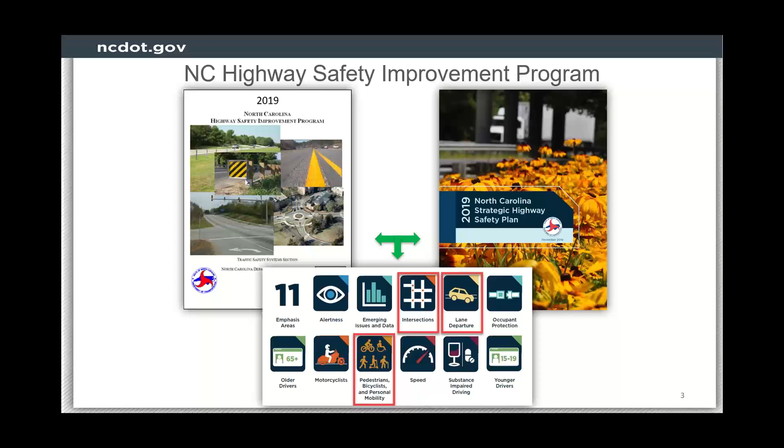So that's a pretty aggressive goal, but this should inform many of our policies and programs and decisions in North Carolina as we go through. Next. So the Highway Safety Improvement Program, we do align it with the Strategic Highway Safety Plan. This is an infrastructure safety program, and so it's focused more on improving the roadway to have the safety results that we would like to accomplish. It does include a focus area on pedestrian safety. It's a broad-based program for intersections, lane departure, but does focus specifically on improving pedestrian safety across the state. Next.

So many people have heard about the pedestrian safety trends recently across the country, and it's definitely pronounced in the South as well and in North Carolina. In the last decade alone, pedestrian fatalities have increased over 50%. That's a national statistic, but it's pretty much in line in North Carolina as well. Almost all of that increase has occurred in urban areas, and specifically on urban arterials, and that's true in North Carolina as well. Rural pedestrian fatalities have stayed relatively constant over time, but our urban areas and arterials are seeing most of the increase.

Darkness and crossing are very, very common characteristics of these pedestrian fatalities. About 90% of that increase in pedestrian fatalities has to do with people trying to cross the road between intersections and in darkness. Those conditions are pronounced in pedestrian fatalities, but they're more significant on urban arterials.

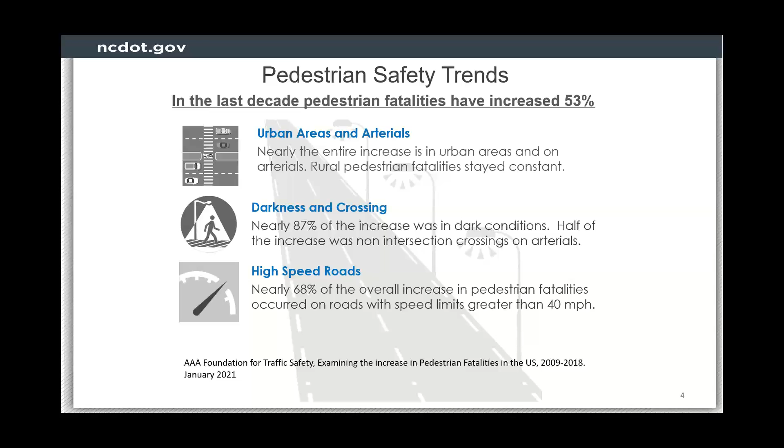High speed, that's well documented as a risk factor for pedestrian fatalities. Again, about 68% of that increase in fatalities has occurred on urban arterials where speed limits were greater than 40 miles per hour. So in North Carolina, the risk of death and serious injury on urban arterials is 5 times greater than other urban roads. And so that's why this is a common theme for us in North Carolina.

Our pedestrian safety improvement program, which is part of our HSIP, looks at pedestrian safety in 3 main ways. The first one, which we're not going to touch on much today, is responsive. That's your typical black spot or hotspot type of program where it's reactive based, right? Crashes have happened. They've accumulated enough to be significant and get attention, or perhaps we've received requests for assistance or complaints from citizens or cities, local government, and so we're responding to those requests, and that's typically pretty effective.

You can get pretty good pedestrian safety projects from that type of program, but it misses a lot of opportunities to improve pedestrian safety because pedestrian crashes do not always follow standard ways of accumulating in one spot that you can treat, right? There's a lot of risk factors that we just went over on those urban corridors in particular. So we have to look at other data sets in addition to just crash data in order to fully understand and really to be able to fully develop a program to focus on pedestrian safety.

So with the city and area and the corridor, those are much more systemic based, where we're using a lot of different data sets and understanding how those data sets relate to pedestrian safety and risk. And we'll get into that a little bit more today on the corridors in particular.

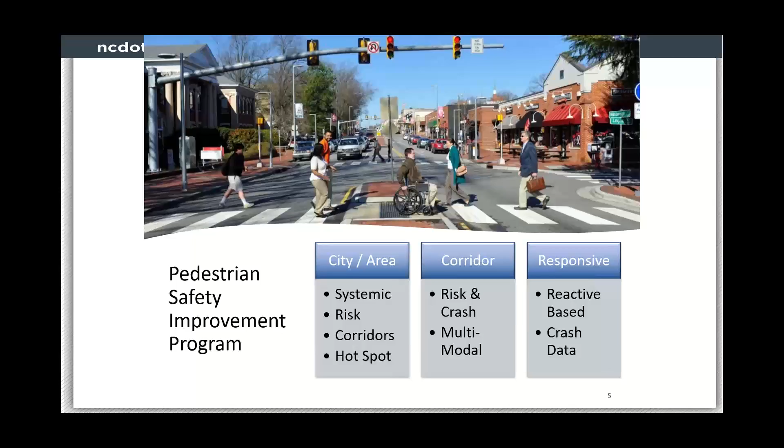So in North Carolina, our corridor risk scoring method, as you can see, and as we just mentioned with the systemic approach, does include crash data. Severity and frequency and density of crashes is considered, but we also look a lot at roadway characteristics as well that we know contribute to the risk of a pedestrian crash occurring and the risk of death and serious injury, such as speed and ADT, crossing distance, and distance between signals. We know that those relationships exist, and we know that they can be very relevant in how we make decisions for pedestrian safety.

Probably some of the biggest area for growth in understanding pedestrian safety in recent years has been in the demographic type of information, using different census data, transit density, land use and population density, different levels of vehicle ownership. All those are very important. In the case study that we're going to share in just a minute, you'll see a lot of those things come up again and again in that process.

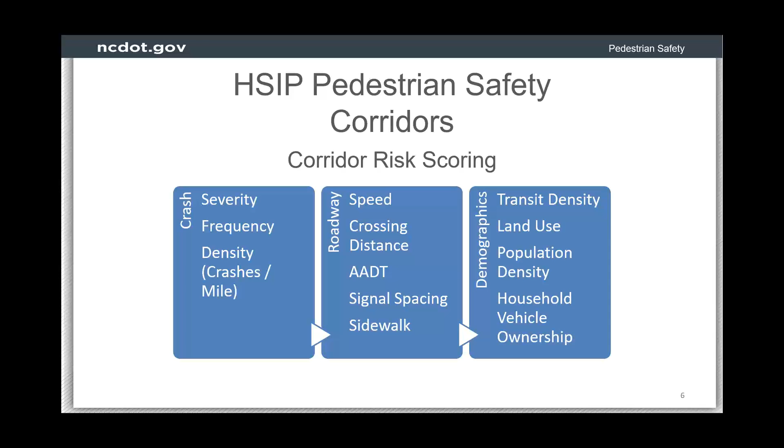Again, using risk-based screening has been very helpful in prioritizing different sections, looking at income level and understanding pedestrian volume. This is a big one because we know that pedestrian exposure is very significant in how it relates to the opportunity for pedestrian crashes to occur. But it's very difficult to find very rich data sets for pedestrian volume. So it's, again, very important to look at land use and transit and different census data in order to understand where that exposure may be higher, and then allowing that to help inform our programs as we select corridors for further improvements.

But eventually, after you select corridors, we do need to go visit them. We do need to make sure that our programs involve reviewing and really trying to find some low-cost safety improvements that can be implemented quickly. That's a big focus of our program, to be able to move quickly to address safety. So low-cost projects that have a big impact on safety are always our first consideration.

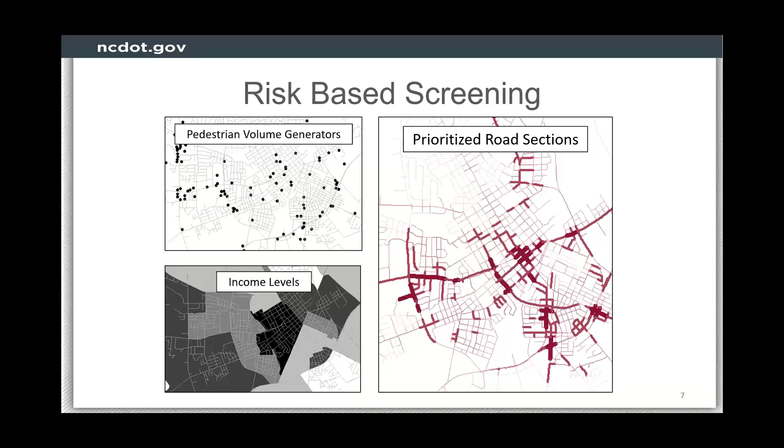With that, Lauren's going to go over a case study on NC54. This was a great project that involved VHB, NCDOT, and a couple of local governments and various agencies. Lauren? Thanks, Brian.

NC54 began as a study for a number of stakeholders in late 2018 after several agencies, including the towns affected, had identified this corridor for some pedestrian safety concerns. So NCDOT convened that group of stakeholders, including the towns, transit agencies, and others, to look at this corridor and talk about what some recommendations might be for improving pedestrian safety, considering elements of risk. So VHB was glad to be a part of that team, and we finished the study in late 2020.

So NC54 is a regional corridor. It's an east-west corridor that connects the Greensboro Triad region all the way to the Raleigh-Durham Chapel Hill Triangle region. It functions as a major regional commuter route for a lot of folks who live in the Piedmont region of North Carolina. We focused on a 4.5-mile section of 54 that passes through the towns of Carrboro and Chapel Hill, and also borders major destinations such as UNC Chapel Hill and the Healthcare Center.

So NC54, built many decades ago, was first established to facilitate that regional transportation, but over time development, housing development in particular, the introduction of transit networks and other growth have changed how people use this corridor and how they interact with it. So that was an important prompt for us.

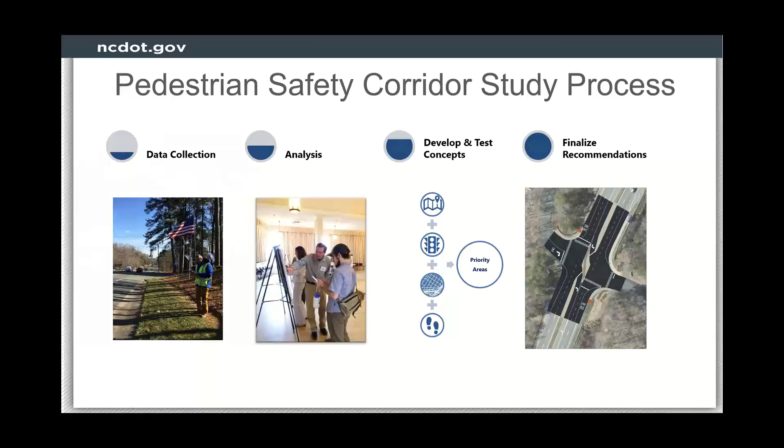So as part of the initial field review, we were able to work with Chapel Hill Transit to put the stakeholders on a bus. We drove the corridor, stopped at multiple locations, observed people, traffic, physical conditions, potential safety issues, and convened the stakeholders back together, listened to each other's observations, took notes.

And so things that we would have noticed in the field looked a lot like what you see in this slide, where some folks were identifying how people were crossing the road, what direction they were traveling. In some cases, we were able to talk to people as they were crossing the road or after they had crossed the road about where they were going, learning a little bit more from people in the field. And other notes, especially from those who have had more experience with this, identified even some potential recommendations while we're in the field.

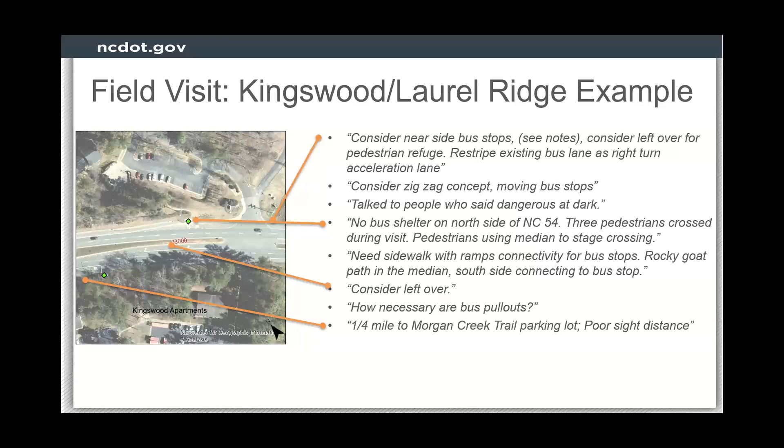At one location, some of the NCDOT staff identified some immediate opportunities for improving crossings at a major intersection on the eastern end of the corridor.

So the team also wanted to hear from people who live along the corridor. We posted an online survey. We posted a QR code in the bus shelters along the corridor, and that helped generate a lot of public feedback. We had over 700 responses from people who live and work along the corridor, a lot of folks who use transit, of course, but others who were students or maybe just got communication from the towns. And we asked them questions about what their experiences and observations have been.

And so a lot of that confirmed some of the safety concerns that Brian mentioned earlier, which is concerns about how pedestrians were crossing and walking along the roadway, especially in dark conditions, and especially in the sections of the roadway where traffic speeds are highest. So this helped validate some of those data points that we had collected.

So we did look at pedestrian crash locations in the history, and for arterials like this, pedestrian crashes may be few and far between. When they do occur, oftentimes they can be more severe or fatal. So we took a good look at that, but of course, the patterns may not be very revealing. So we considered where the crashes have occurred, but also looked for ways that we could fill in the gaps to understand risk.

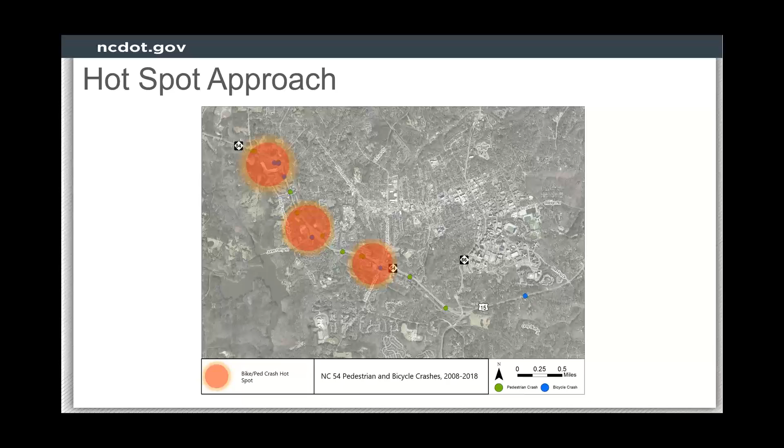So we collected data about speed, traffic volume, pedestrian activity. We wanted to have a better understanding about the traffic speeds relative to the posted speed. So the posted speed was 45, and in some cases, the 85th percentile speed was in excess of 55 miles per hour. So that middle section of the corridor, especially where there are uncontrolled crossings and a lot of apartment complexes, those speeds were especially concerning to us. So we were thinking about how that translates into risk.

And you can see here that the ADTs on the western end, nearer to the Carrboro end of the corridor, are about 20,000 vehicles per day. That doubles on the eastern end. Part of that's how it interacts with other major corridors that go north-south throughout the study area. But approaching 40,000 vehicles per day, that certainly limited some of the options that we could consider, and it just made this risk and exposure all the higher.

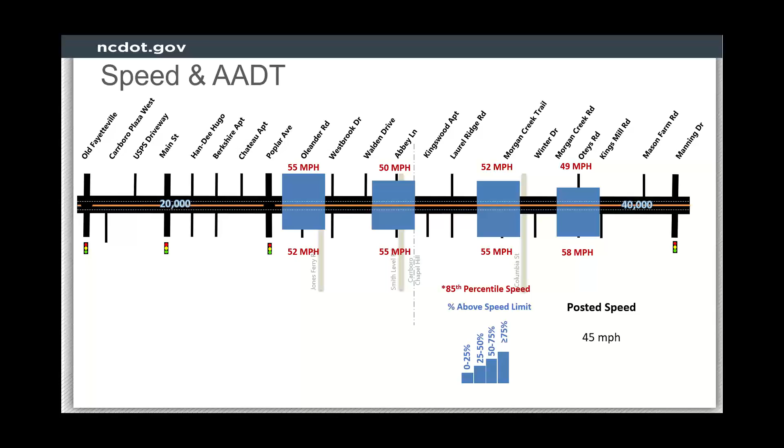So when we have transit on the corridor, it becomes a really important data point for us to collect. We worked with Chapel Hill Transit to collect boarding and alighting data. We mapped that along the corridor where there were bus stops. So the bus stops stop in the eastern third of the corridor, but where we did have bus stops, we not only looked at the number of people getting on and off, but the balance of the number of people boarding and alighting at a particular bus stop.

So how many people were getting on and off at the same bus stop, or where did we see some particular imbalances? So for example, if you look at the intersection of Laurel Ridge Road and NC 54, you can see that that pair of bus stops across the road have a major imbalance. A lot of folks getting on one bus stop and then getting off on the opposing bus stop. So that led us to understand more about what may be happening along the corridor.

The pedestrian volume data, the crossing data in particular, confirmed a lot of what we were beginning to think about the corridor. Where we saw those bus stop pairs and the imbalances in the alighting and boarding, we saw the heaviest pedestrian crossing data. If you think back to that crash map that I showed earlier, there were very few pedestrian crashes in that middle section, but the risk is highest in this section.

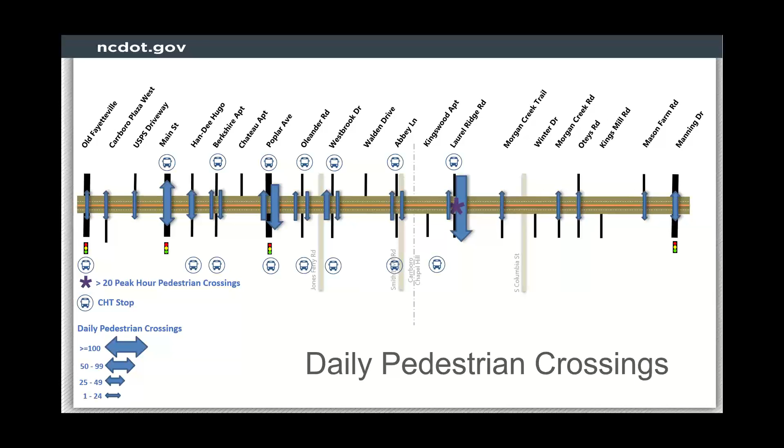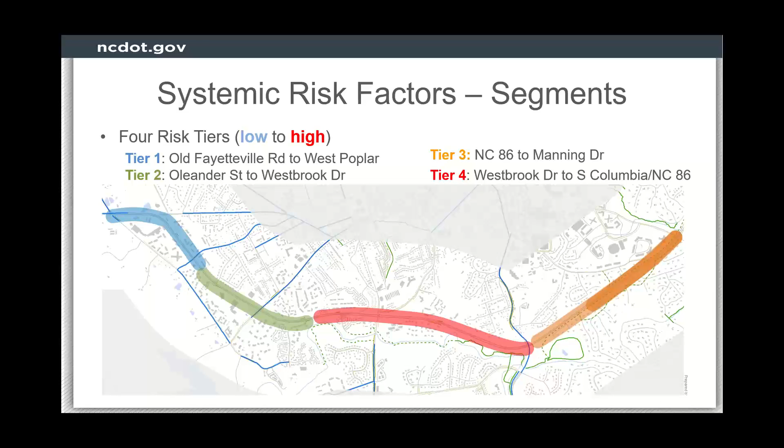So all composed together a risk factor map for the corridor. This helped us to prioritize the locations that we wanted to delve into the most. And so that helped us, again, focus on that middle section where speed, volume, pedestrian activity, transit stops, and development were pointing us to the highest risk. So this middle section got a lot of our attention, but certainly we identified recommendations for almost all of the intersections along the corridor, as well as some considerations for how the network functions overall.

And so considering how transit was an important risk factor for this corridor, we did think about how we could maybe consider some transit alternatives. What would happen if we were to propose route changes, scheduling changes? Would that impact pedestrian activity and safety in a substantial way? We looked at several alternatives, and this was just to understand if there was an easy win, an easy way to be able to address this.

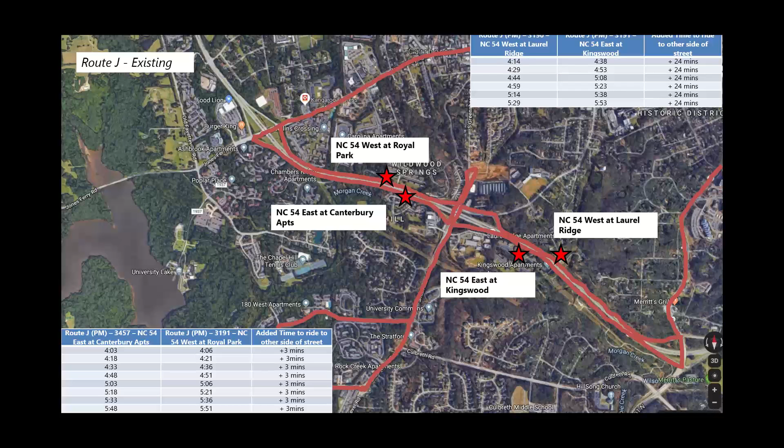But considering that these are people who rely on transit to get to where they're trying to go, there was a balance between their own mobility and how the changes to the transit system may impact that. So we looked at several alternatives and really couldn't find a good alternative that was likely to reduce that demand for crossing. So we did coordinate this with Chapel Hill Transit, and it led us to know that we needed to look harder at ways that we could improve the physical crossings along the corridor.

We coupled this information with what we were hearing from the towns as well as NCDOT about the future for connectivity across and along the corridor. A lot going on here. The towns had plans for bicycle and pedestrian networks, both along 54 as well as parallel to NC 54. NCDOT was preparing to study the eastern end of this corridor for a major widening improvement.

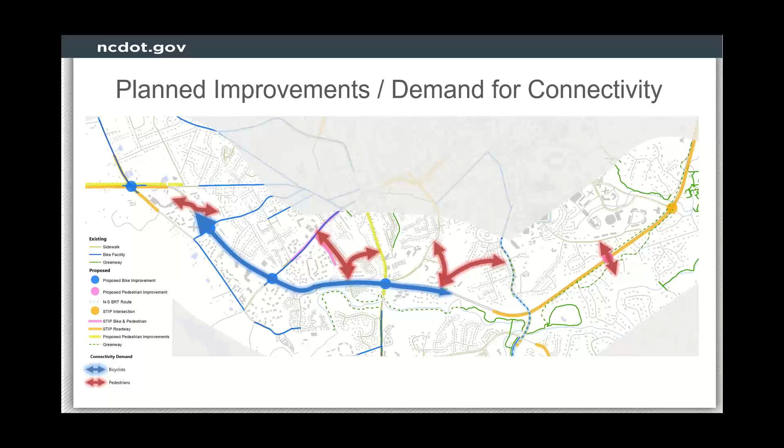And then also we looked at physical proof that there were people walking behind the corridor. So worn paths in some of the natural areas connecting those apartment complexes, which are typically isolated and not connected into a larger transportation grid. So we looked at all of that to help us better understand how people were moving along the corridor. And that helped us develop what we were calling a connectivity plan.

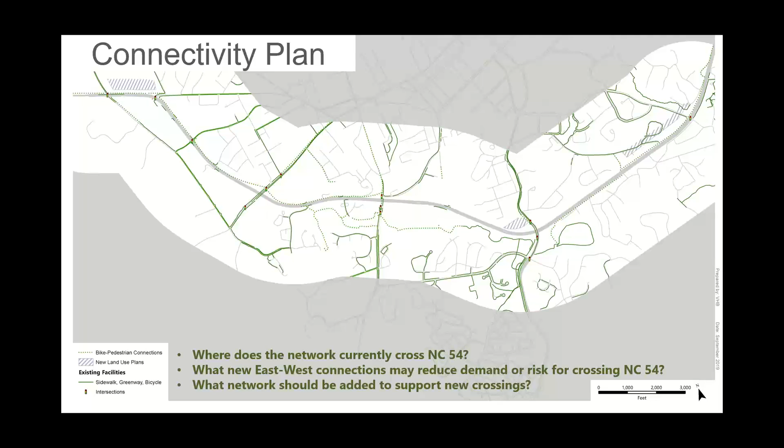So the intent is not necessarily to build all of this network as part of the safety improvements, but again, to help us understand where people are most likely to cross NC 54 today, as well as in the future, lining that up with risk, lining that up with where the towns were going in terms of some of their short-term projects, where they were building new greenways, for example, along NC 54, where those were likely to come up to NC 54 in the near term, to help us make sure that we weren't overlooking any important crossing opportunities in the future.

So altogether, we looked at improving pedestrian safety at multiple types of conditions, signalized intersections, several uncontrolled crossings, like I mentioned, where there were no formal crossing accommodations, no traffic signals. That was an important part of this study as well.

And then continuing to communicate with the towns about how we could integrate their connectivity plans into longer term improvements as well. So the study team, including the towns, have continued to use this study for their own work to prioritize some of the pedestrian improvements that they're planning to build nearby. And then NCDOT continues to look at some of the recommendations that, as Brian mentioned, could be implemented in the near term, especially where those low cost improvements could make a big impact on improving pedestrian safety.

So with that, I think that'll cover the study area and the study process. And Brian, I don't know if you have other things to add about where things go from here.

You're on mute, Brian. Uh-oh. Oh, there you are. All right, there we are.

Thank you. Yeah, on this corridor in particular, it gave us a good opportunity to really think through a lot of the risk factors that we had been working with for some time, and being able to see how those really did work in terms of identifying risk and helping us prioritize efforts was beneficial. So those processes will continue to be refined, and the program will continue to become better established in

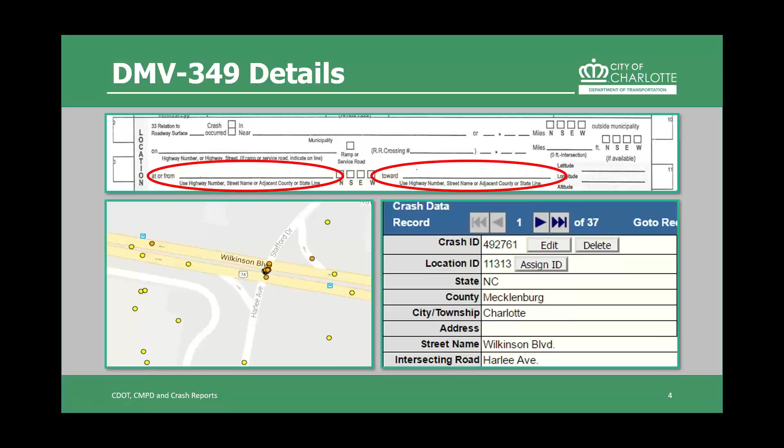So I'd like to share with them details of the form that they fill out, which is called the DMV 349 here in North Carolina, that we get the at or from data and the toward data. That's important for us. That's what shows up down here in the Wilkinson Boulevard at Harlee Avenue. At Wilkinson Boulevard, the intersecting road is the toward street. And at driveways in particular, giving the street address or a business name or distance from the intersection is especially useful.

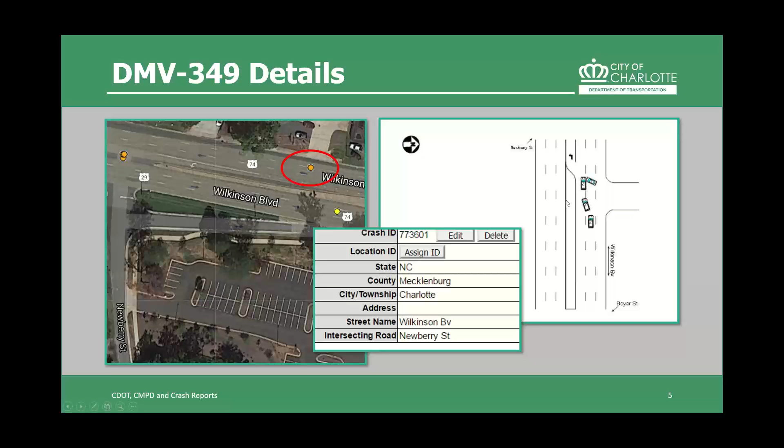So without reading the narrative and looking at the crash diagram here, my staff member who geolocates every one of these crashes would have located it at Wilkinson and Newberry Street, but because of the diagram, he saw that it was at the driveway, and so was able to geolocate it appropriately to be at the driveway.

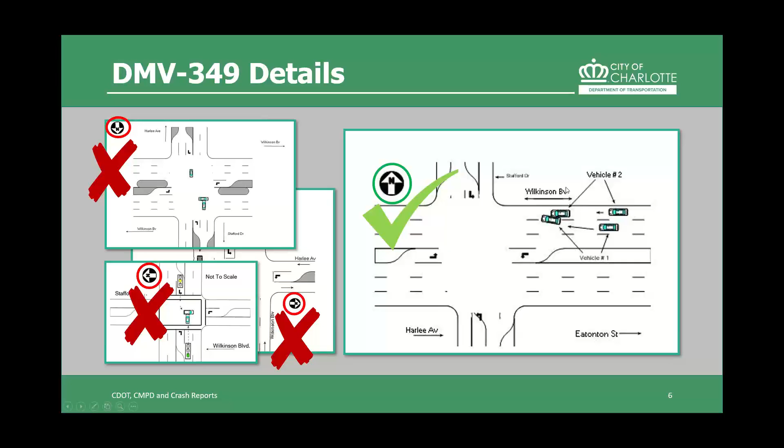This is one of my biggest pet peeves with our police officers. They have no notion of putting the north arrow up. And so I have been coaching them now for 4 years on consistently putting the north arrow up. As you can see, I have 4 different crash diagrams for the same intersection and 4 different directions on the north arrow.

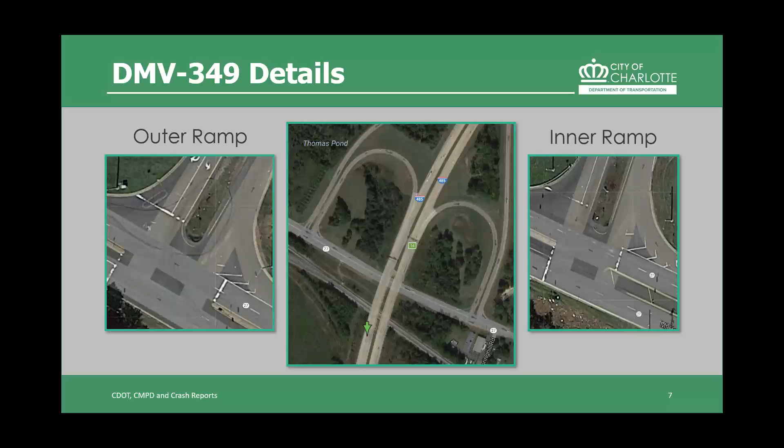We also have some quirks here in North Carolina, especially here in Charlotte. This interchange, the ramps on the south side and the north side are geometrically identical. One is the inner ramp and one is the outer ramp to 485. But without any details from the police officers, we make a guess about where to code the crash. So if they don't specify the differentials in the geometry, we have to make a guess about where to geolocate that crash.

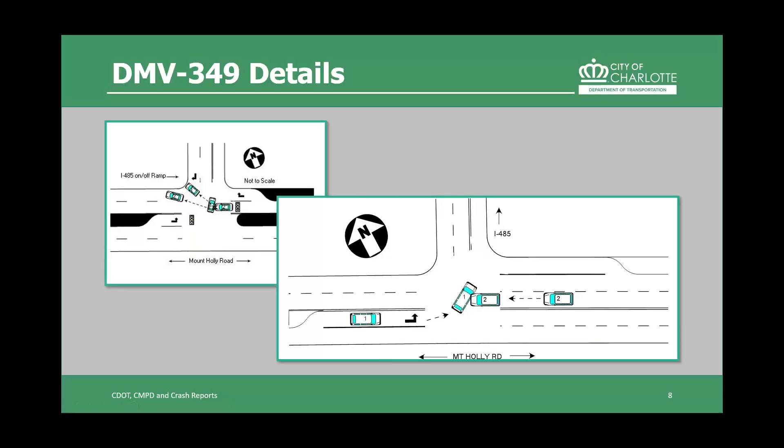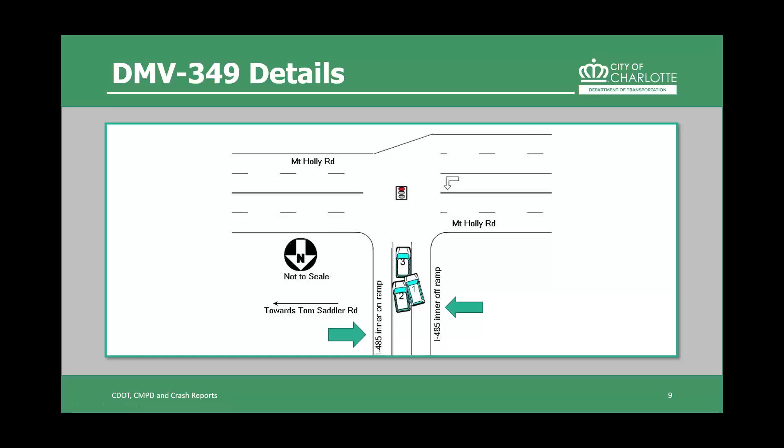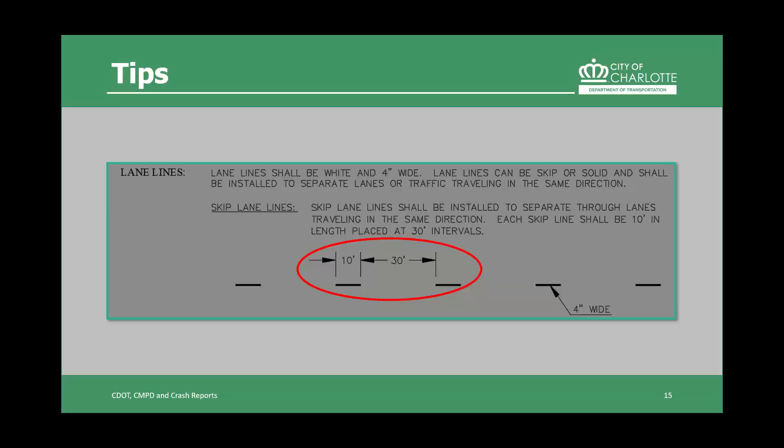Now for some tips that I like to give officers. They often aren't aware of this, but in Charlotte, skip markings are 10 feet long with a 30-foot separation. So if you count the skip lines, you can actually estimate distances from intersections or businesses.

And then I like to talk about speed. At 20 miles per hour, 1 out of 10 pedestrians hit by a vehicle is likely to die. If you simply double that, the number of fatalities goes up exponentially, and most likely 9 out of 10 of your pedestrians will be killed. The other important factor here is that pedestrians and bicyclists account for less than 5% of our crashes here in Charlotte, but they account for nearly 40% of our fatalities.

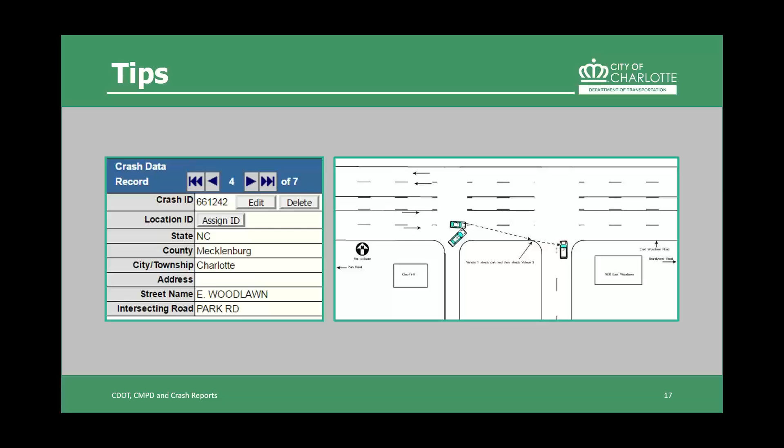We have some weird things here in Charlotte where streets intersect streets twice. So for instance, Ballantyne Corporate Place intersects Ballantyne Commons Parkway in 2 locations. It's a half U basically, or a U-shaped street. Without street addresses or landmarks, again, we have to take our best guess at where to geolocate this crash.

I also ask the officers to read the website called crashnotaccident.com for why they should change their terminology from accident to crash. It's a very powerful reading, I think. It asks you to take a pledge. I also share the Vision Zero website with them here in Charlotte. And then I usually share, we have an internal city network mapping system with many layers that they don't know is available to them. I don't know why the police department doesn't know about this because the rest of us do. But it's called Charlotte Explorer. And so I share that with them as well.